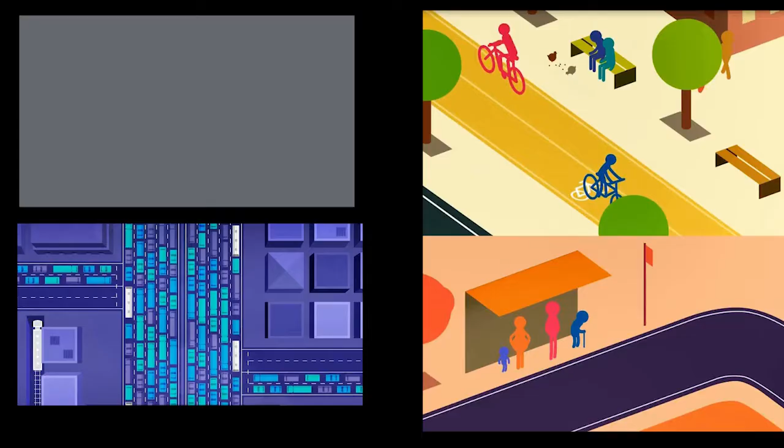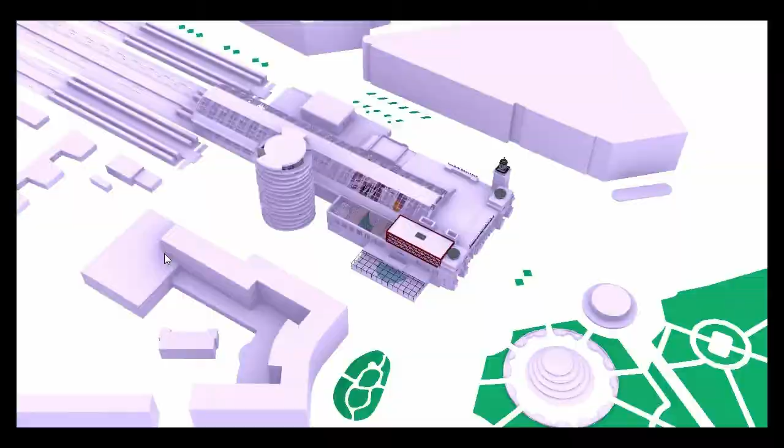Sustainable transportation in a new post-carbon society must be shared and electric. In order to accomplish this, a transportation center is proposed, understanding mobility as an integrated service. The project takes place at the Kievsky railway station, so the trains are also part of the system, allowing it to cover short, middle, and long distances.

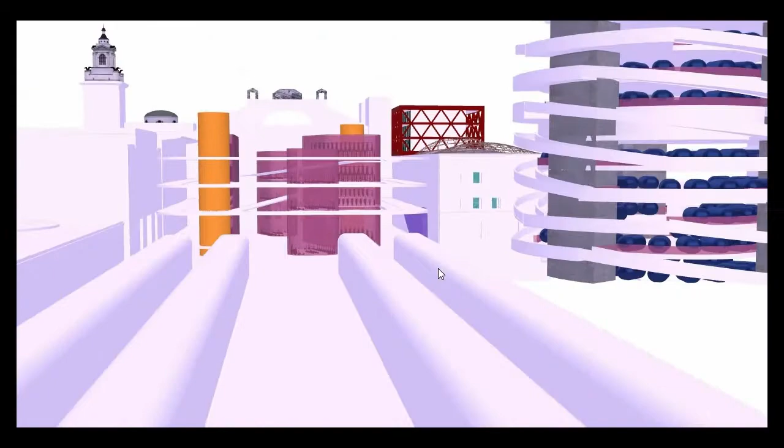The cars and motorcycles will be located in a parking tower that will be equipped with charging points. Under the vault, beside the platforms, a bicycle and scooter parking takes place, generating a space of mixed mobility.

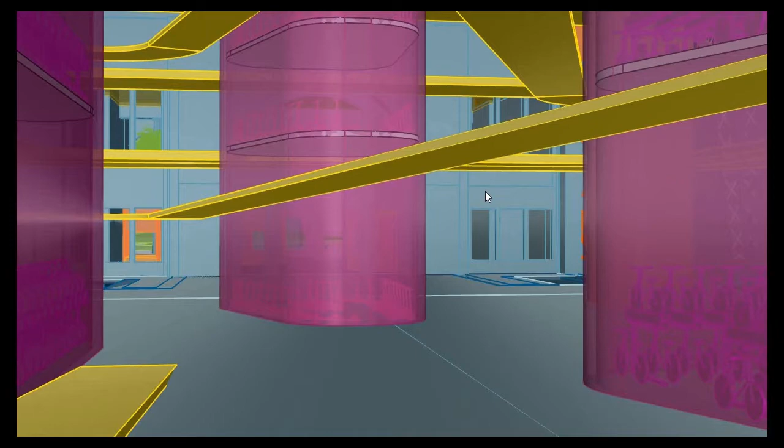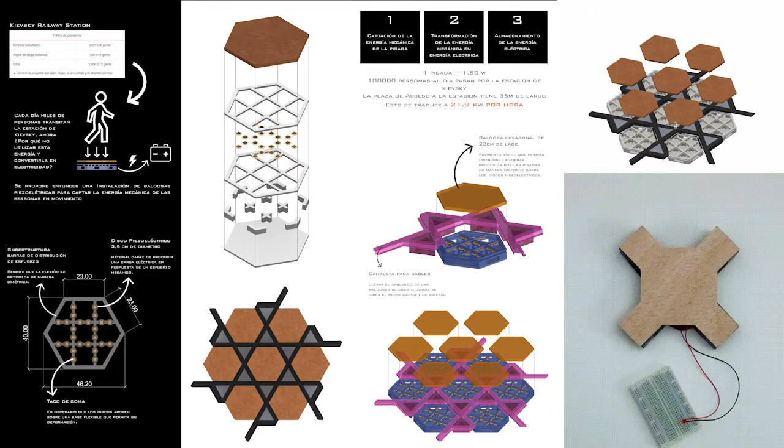The energy to charge the vehicles will be obtained by the prototype proposed, which consists of a pavement capable of transforming mechanical energy produced by pedestrians into electrical energy, thanks to the piezoelectric phenomenon.

The prototype will be located at the main entrance of the station, an indoor square, as well as on the arrival and departure platforms, these being the points of greatest transit.

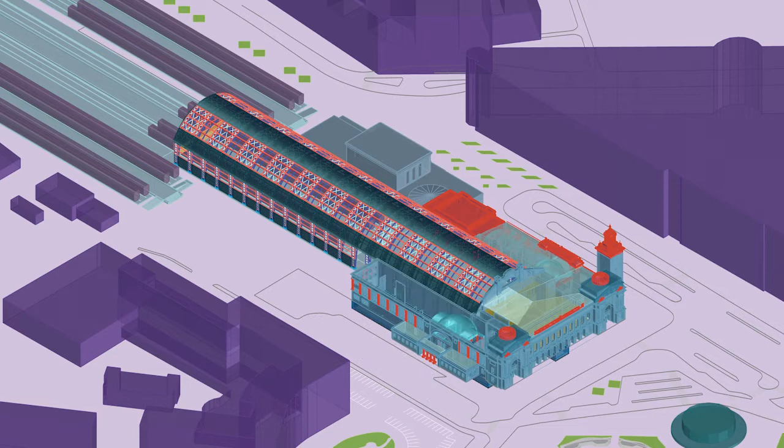In addition to the mobility center, a hot springs and a shared stay is proposed. The south wing of the neoclassical building is emptied for the hot springs.

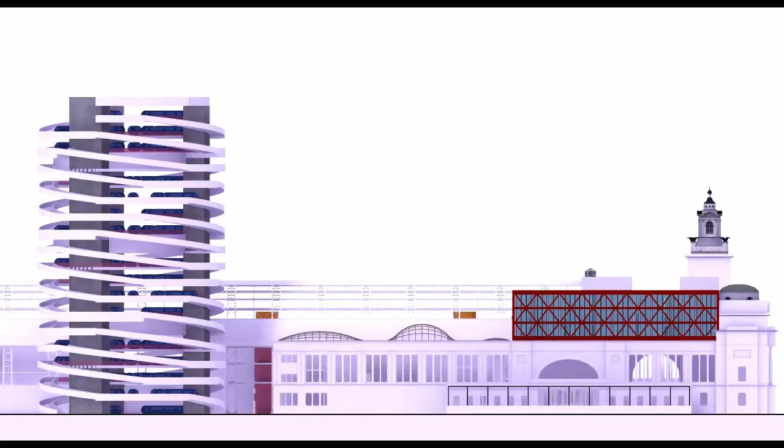The program is developed from the thermal circuit, understood as a sequence of spaces that occur through a path. The different rooms vary their levels given the topography of the pools, flooding the spaces and respecting the zero level of the current building.

The shared stays are located on top of the south wing. They are developed from a flexible module that allows generating...